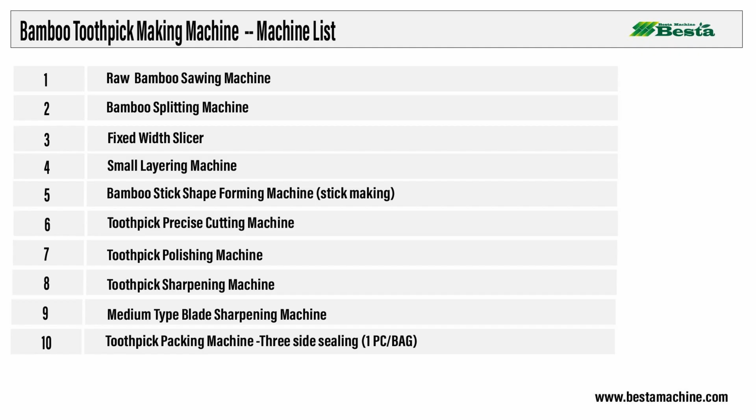For bamboo toothpick production, the line consists of different types of machines. Each machine has its own function.

The first machine is the raw bamboo sawing machine. We need to cut the bamboo into certain lengths, for example, 1.9 meters or 2 meters. This is a demo video.

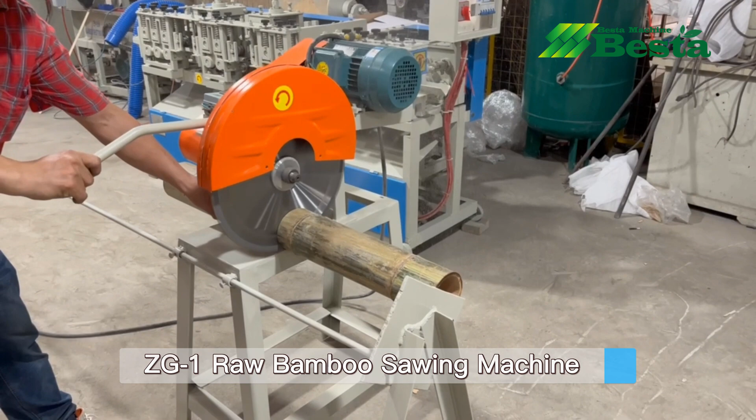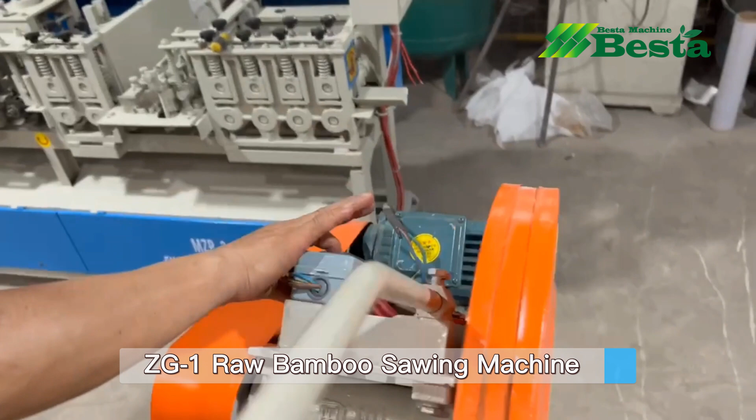After bamboo cutting, we need to do the bamboo splitting process. This is the bamboo splitting machine.

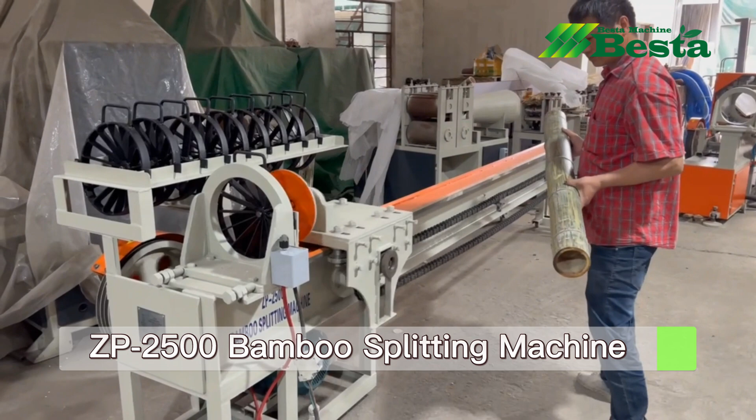We put the bamboo pole into this machine. The inner hole of the bamboo should match the inner hole of the blade.

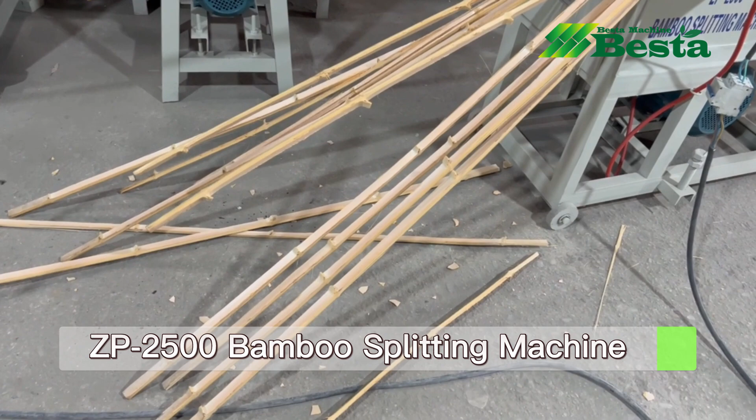Splitting. Stop this machine. Usually this machine is operated by 2 persons. One person takes out the already split bamboo strips.

This is the bamboo strips after splitting. You can see that each strip has a certain width.

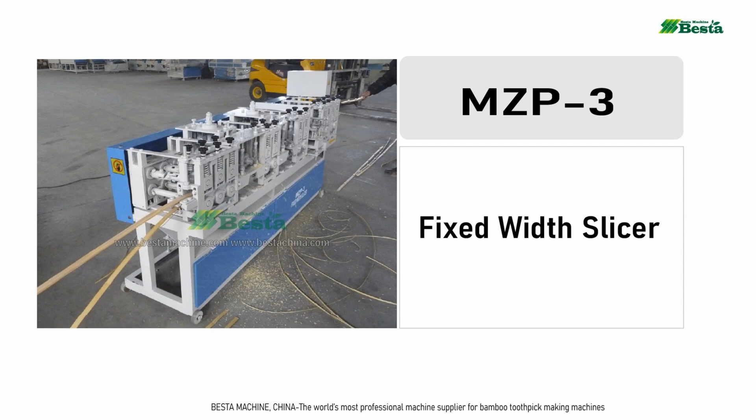This is called the fixed width slicer. This machine is for removing the bamboo knot part inside and outside, and also setting the widths.

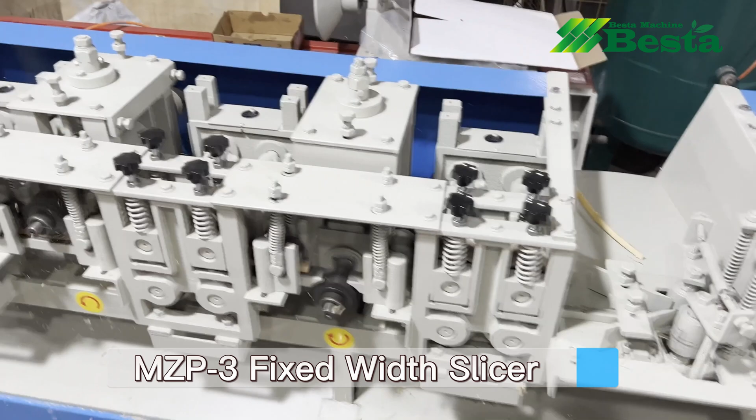It also separates the green layer from the yellow layer. After using this machine, you will get a standard size strip.

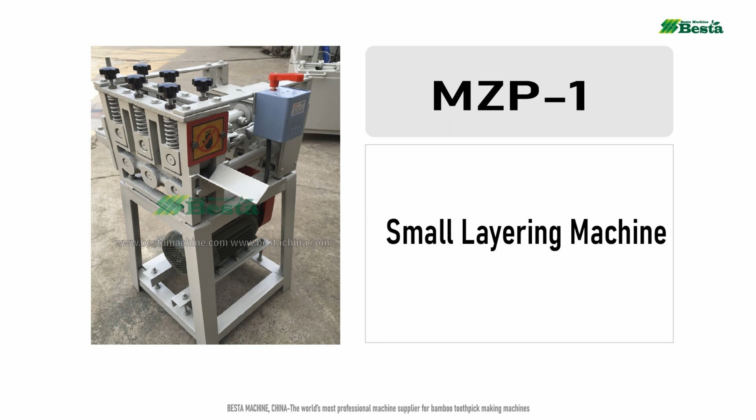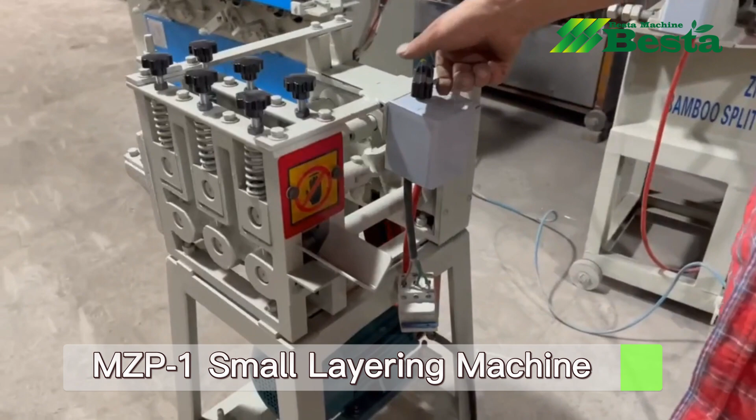Small layering machine: for very thick bamboo strips, we feed the strips into this machine and get the well-set thickness. The downside strip is the thickness we set.

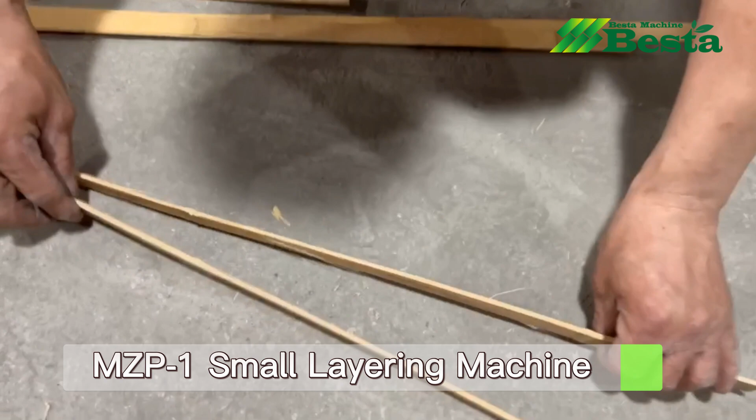The downside strip is the thickness we need. Then it will go to the next step for stick making.

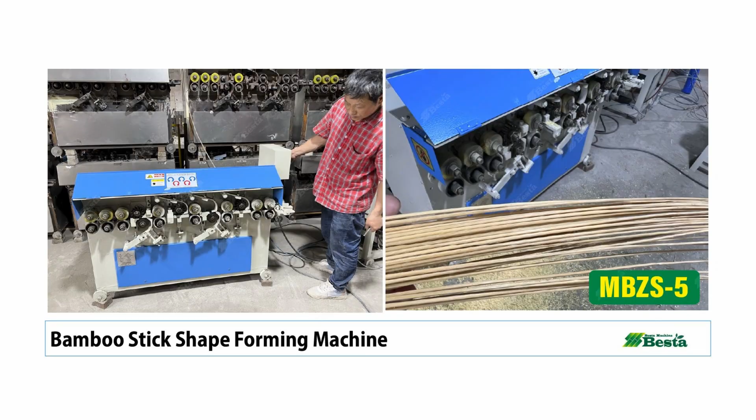The MBZS5 is a machine for shape-forming bamboo strips into round bamboo sticks. For bamboo toothpick making, the shaping blade size we equip is 2.0 mm.

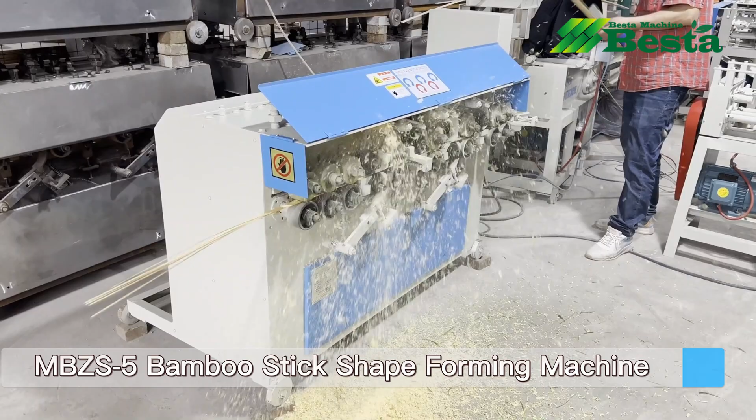The standard diameter of a toothpick is 2 mm. So after using this machine, you will get a standard diameter stick of 2 mm.

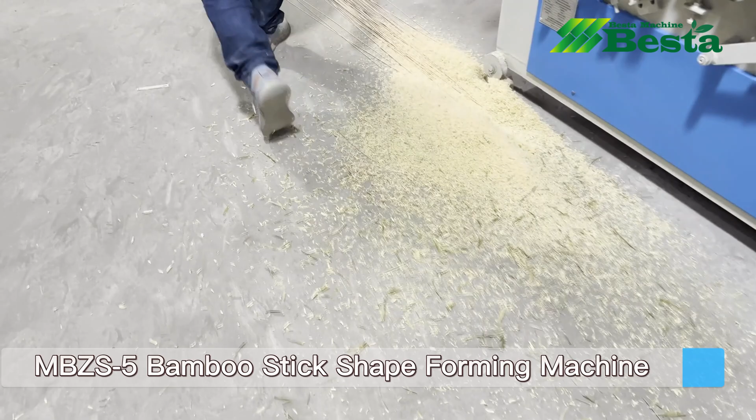Then we stop this machine. After we get fresh bamboo sticks, we will do the bamboo stick boiling process for chemical treatment, and also go for the drying step.

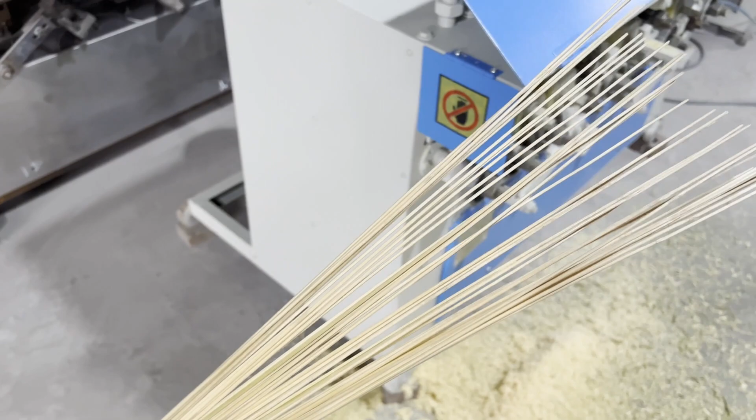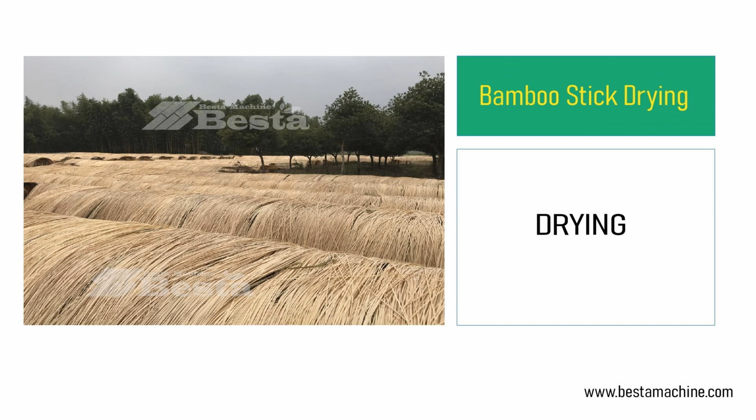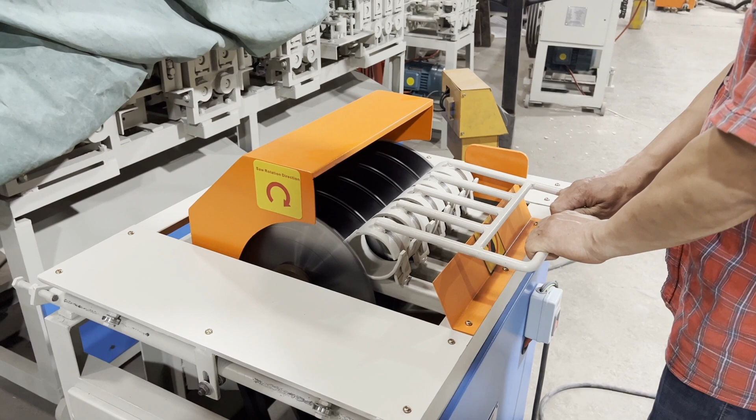Start this machine, this is a machine demo. You need to put the long sticks in the area and then press and feed.

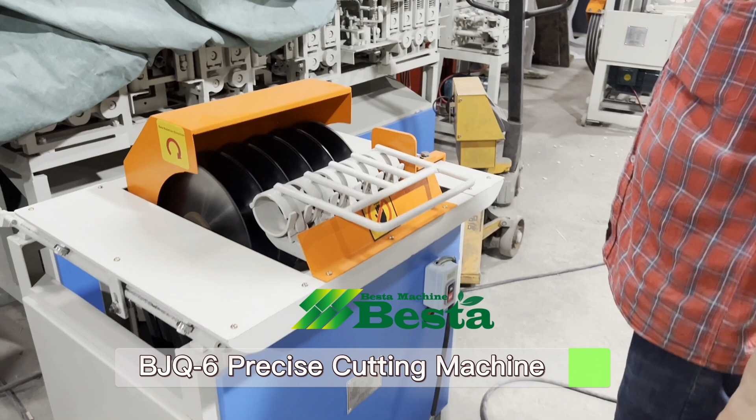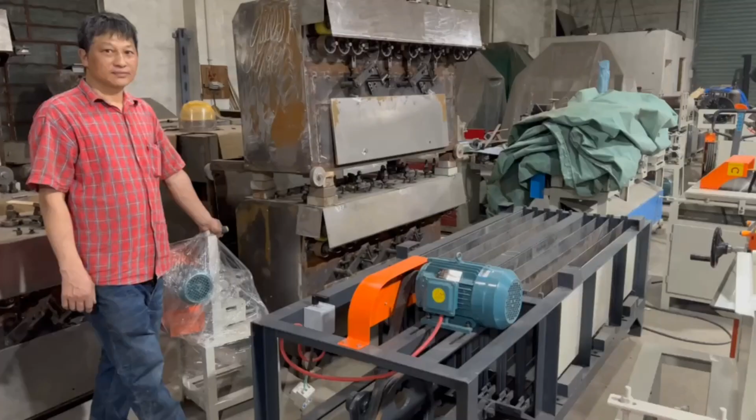After you get 65 mm sticks, we will put them into the polishing machine for polishing the surface of the stick to make it smooth.

For this machine, it will also remove unqualified, shorter or broken sticks during the polishing process.

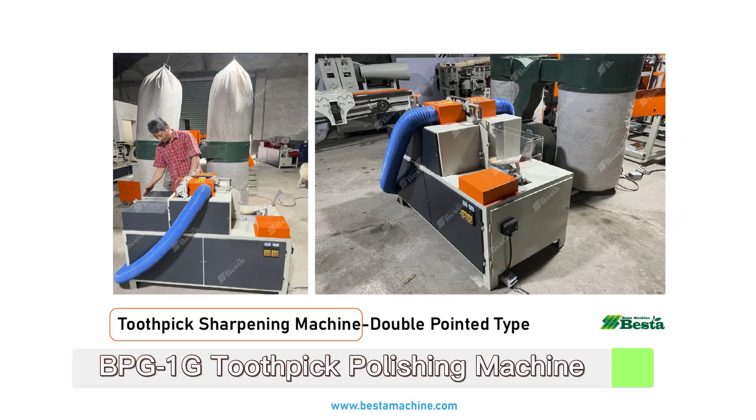Then it will go for the sharpening process, shape-forming round sticks into toothpicks, double pointed.

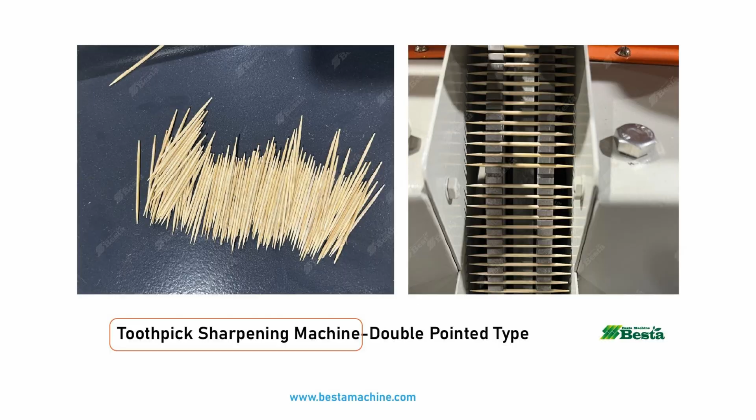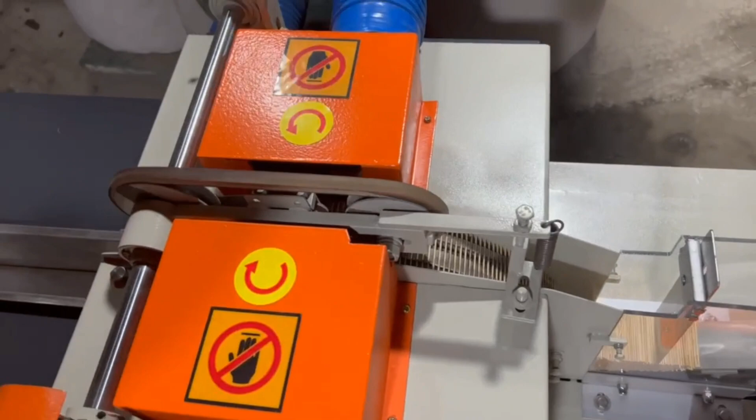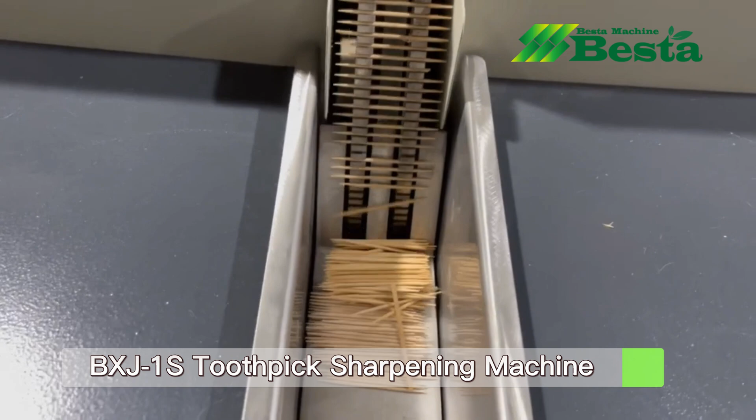We have already polished the bamboo sticks, making it easier for feeding into the bamboo toothpick sharpening machine. This is a double pointed type sharpening machine, so you will get double pointed bamboo toothpicks.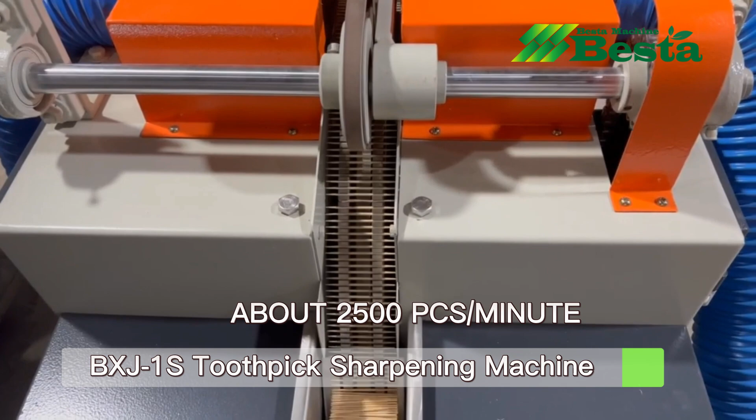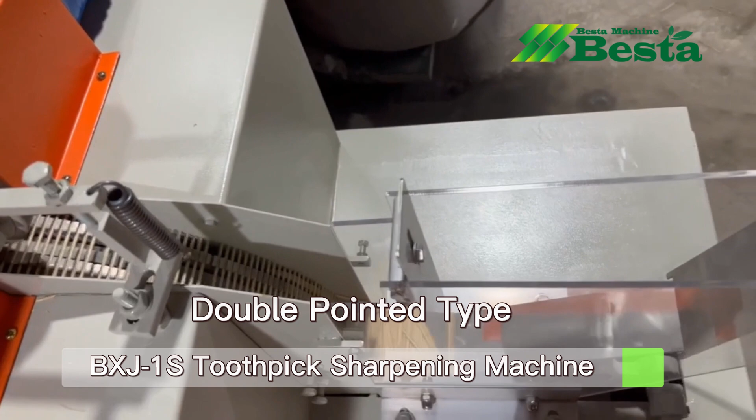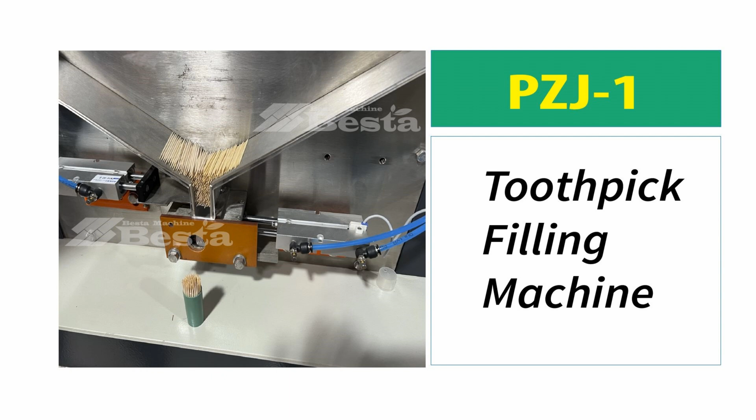The feeding of this machine is very continuous. It is the latest model. The toothpick filling machine is for filling the toothpicks into bottles, into the plastic bottles.

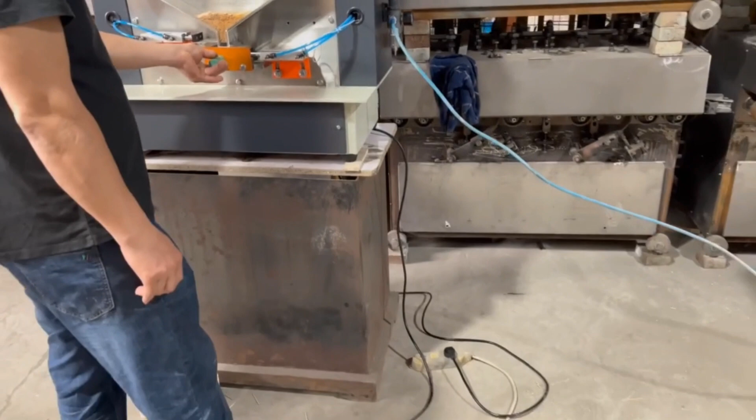This machine is specially designed according to your plastic bottle size. One machine can work for one size only.

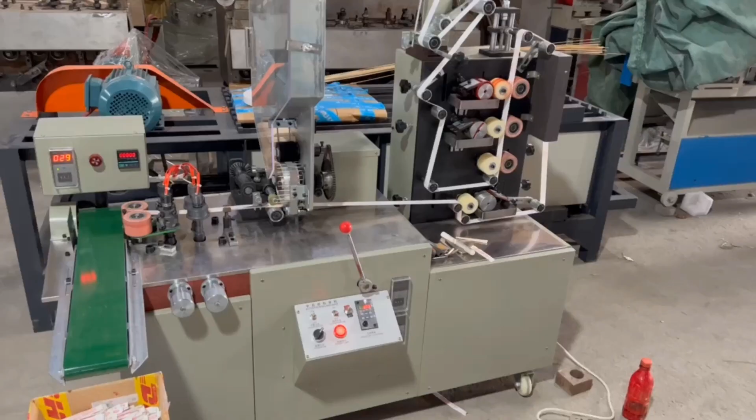After you start this machine, we need to move the button to on, and it will start a heating process.

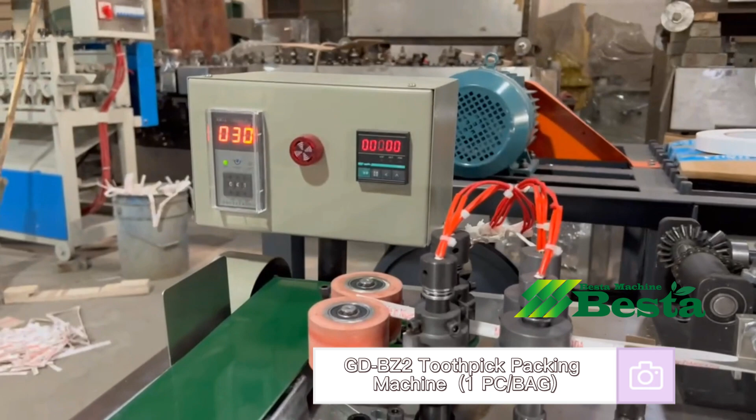After the temperature reaches the temperature we set, then it is ready to be used.